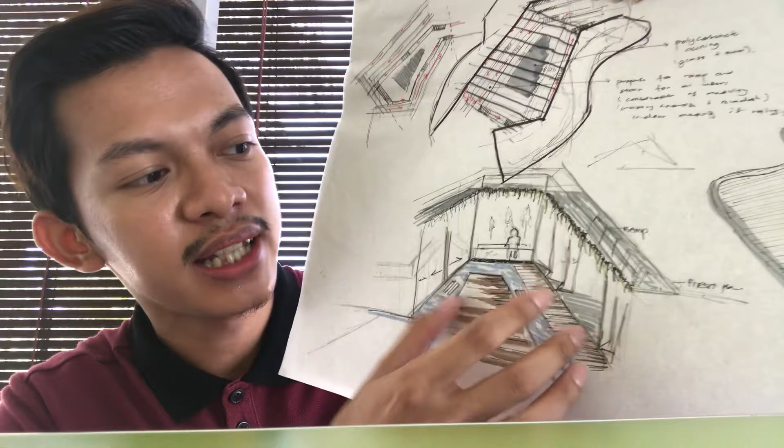And actually what I try to convey here is that the middle of the activity block can give calmness to the elderly, because here I made an open space, so it's good for air circulation.

And here they can do indoor activities. The indoor activity I included here is, actually my client is KPJ, and KPJ provides walking exercise activities, but actually Site A is quite limited for walking outside, so I provide a ramp into the middle also.

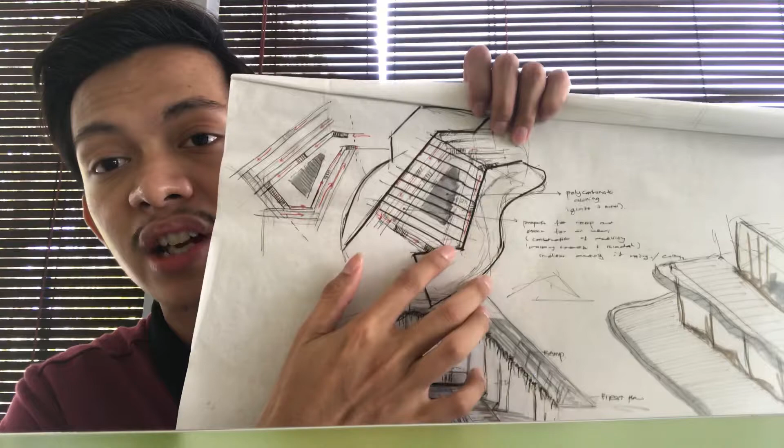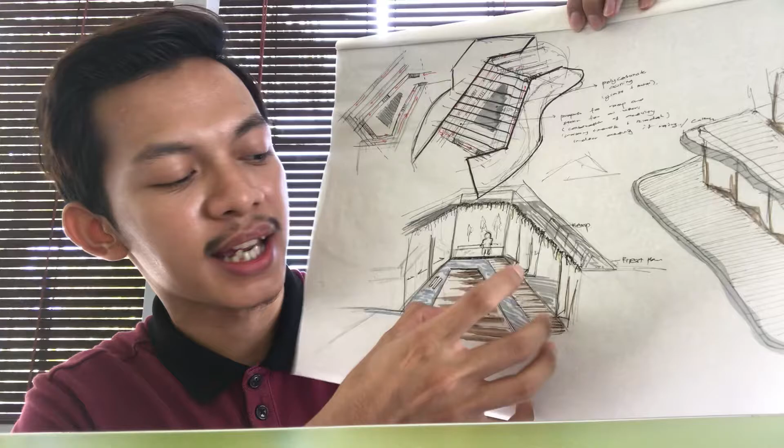Since elderly people like something new and natural, on the sides of the ramp I will provide planter boxes, so the middle area is more green and natural.

Okay, so actually elderly people don't really like things that feel too blocked off, so I don't make it all solid walls, but I try to give natural lighting, which is in the gymnasium area.

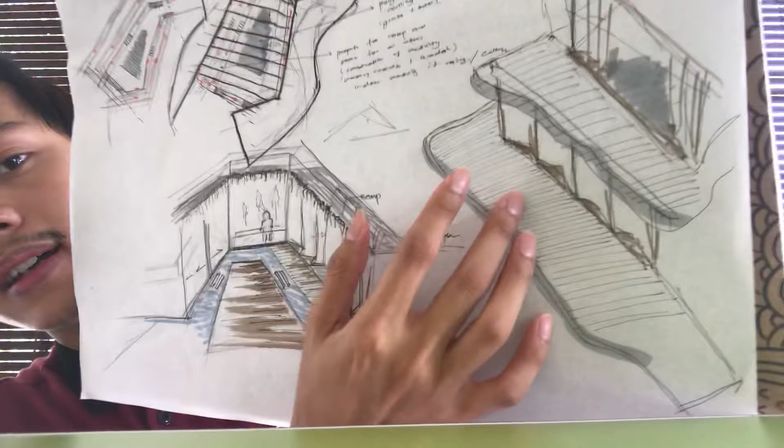And for the gymnasium I will provide a terrace also, so they can go to the balcony to view out to the lake, and above it is the living hall for family.

This is one of the activities that KPJ provides.

Okay, so that's all, the best design, what's interesting in my design, and I hope you can give your comment on my design.